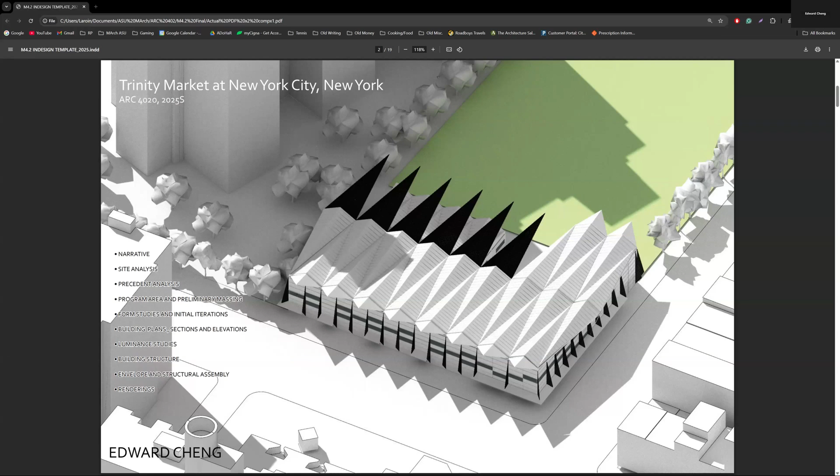Our assignment for this project was to conceptualize and develop a marketplace for a city. This market, Trinity Market, is located in New York City on the southeast side of Manhattan. Here we see the market itself on the site. We'll go back to this form, but something I want to highlight is the roof shape, which was really the primary driving force of the shape itself.

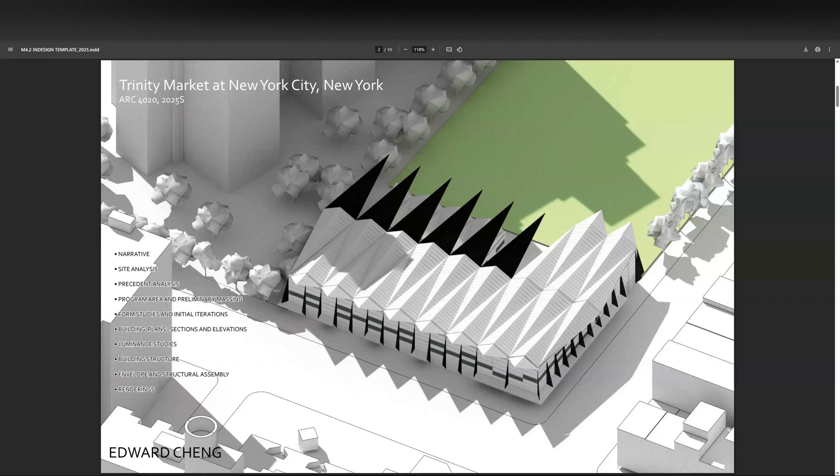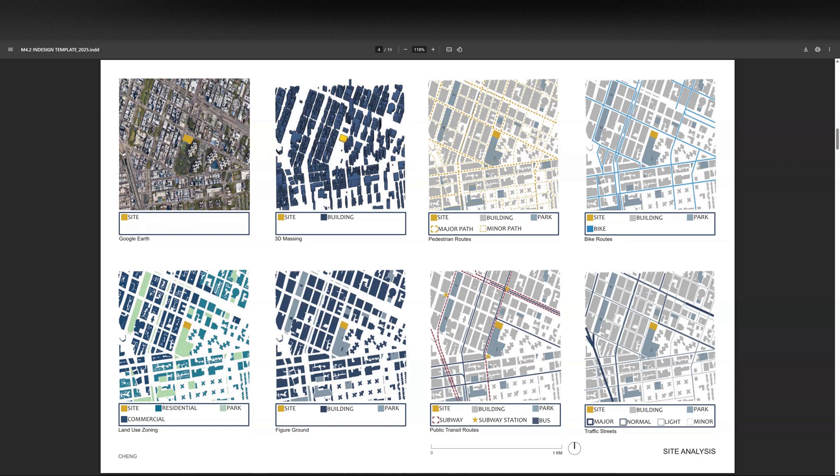Moving on, we have the site analysis of the area, the city that our market is situated in. The main streets are Grand Street, which runs left and right, and Essex Street, which runs diagonally north and south. The market site is on the yellow center block there. Our market site is located between the Williamsburg Bridge and Manhattan Bridge, and also sits between the commercial section of the city and the more residential parts, as you can see in the bottom left.

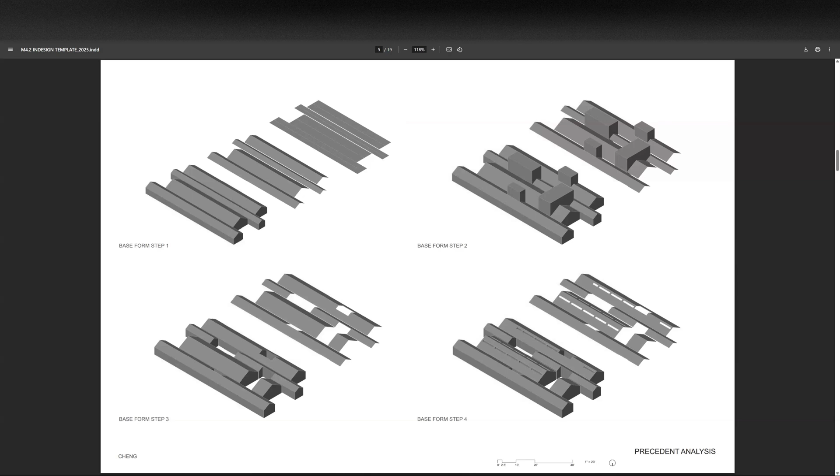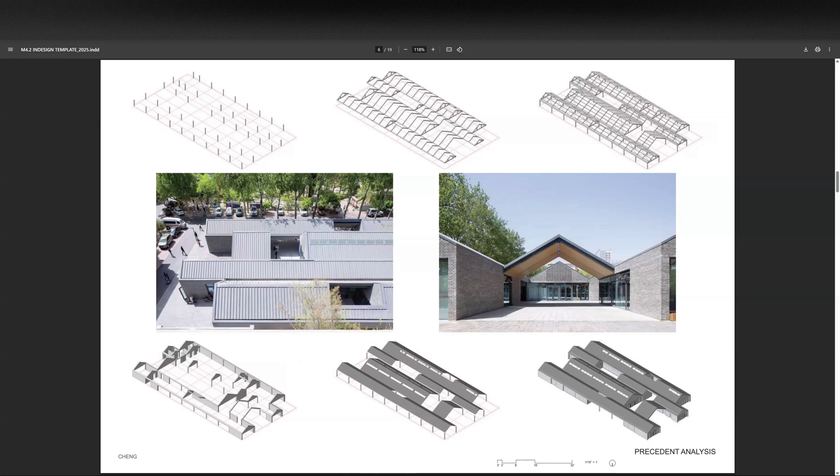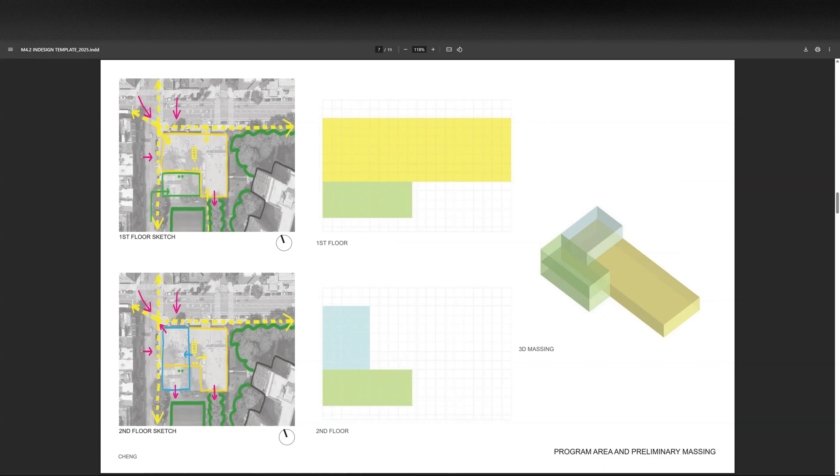Moving on, we return to the site, and here we have some initial sketches I made early on to clarify where traffic comes and goes and provide a general sense of the layout. In the middle and to the right is the preliminary market layout I chose to pursue, with the market hall dominating the space in yellow, and the green service cores flanking it to the south. The blue community service, part of the market, is located on the second floor here. And things get shifted around, as we'll see.

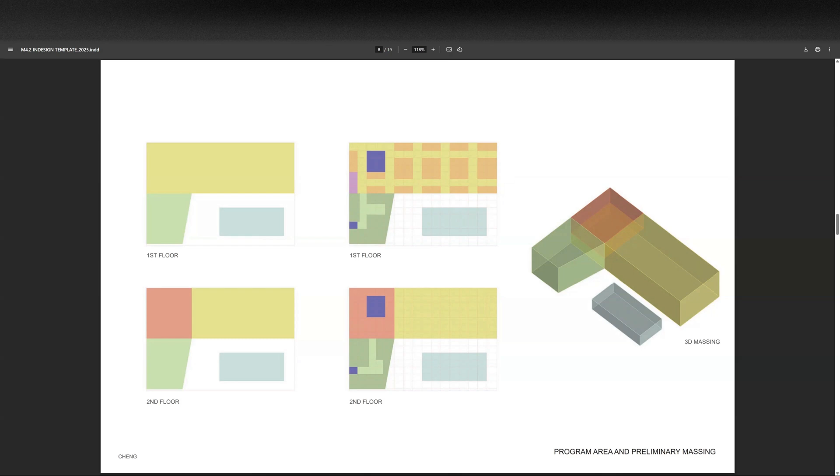This is the final iteration of the market. As you can see, the market hall is still uninterrupted, still dominating the space, still flanked by two stories of service cores. However, the community center is no longer part of the main building and instead is on its own, situated in a plaza formed by the L shape of the market itself, with foreground and background considerations. Where the community center was, it's now a cafe space with a window that looks into the market hall and vice versa, for interaction between customers and diners.

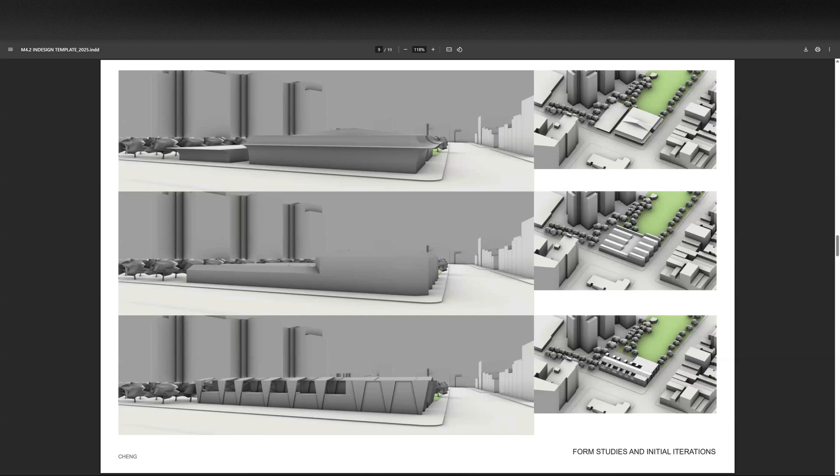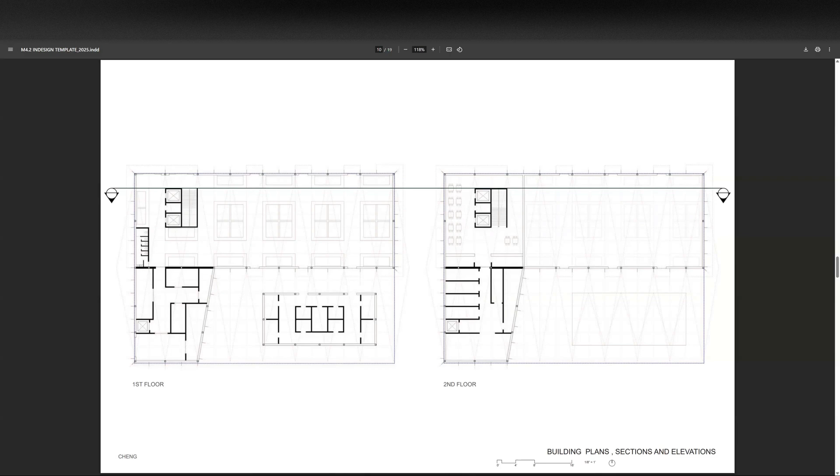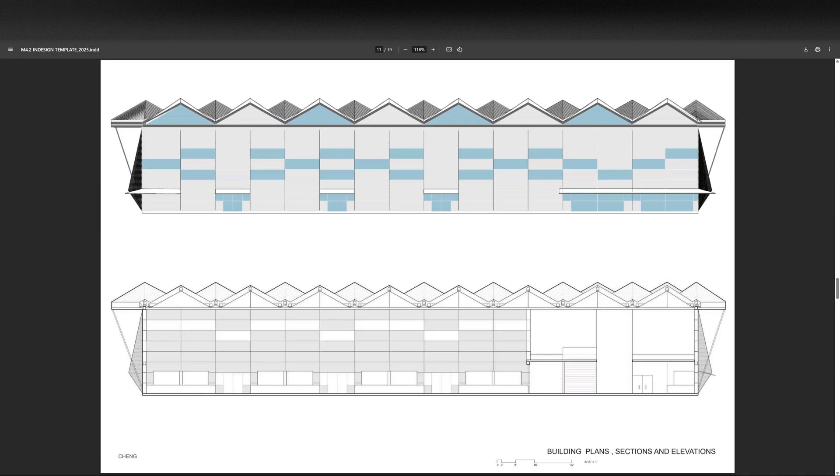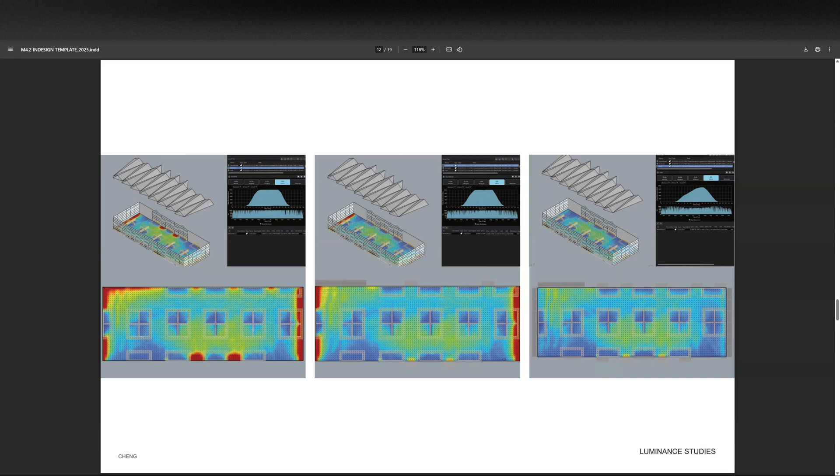Moving on, we have Climate Studio light studies. The market space in these shots has been updated since, but a majority of light interactions generally remain the same; not much was changed besides adding a few things. As you see from progression left to right, adding shade louvers and those vertical shade structures helped mellow out the light coming in from the sources and from the sides, leading to our final product on the right, with a very consistent overall lighting aspect.

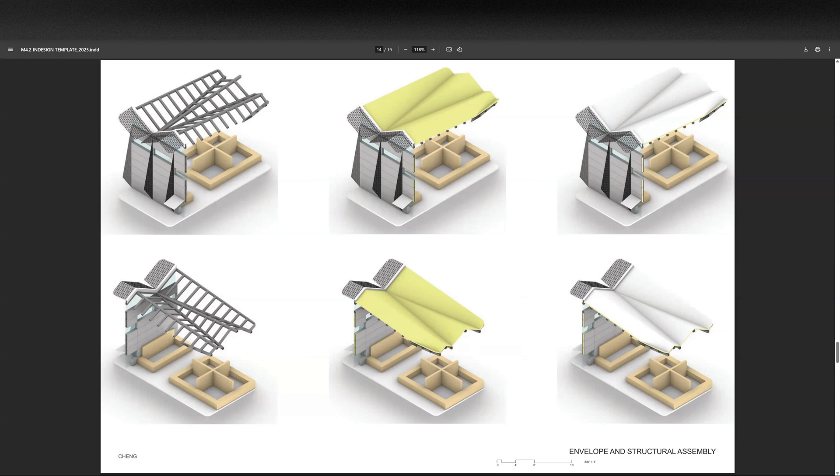Here's the same section cut, just with the structure built up. As you can see, the roof framing, insulation layers, vapor barrier, decking, and final finishes.

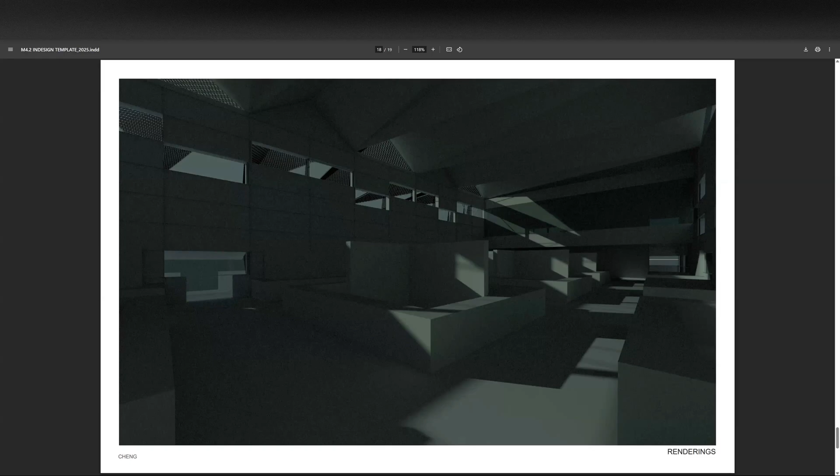On the right, you can see the cafe space and the windows and how they overlook the market hall itself. Up top, you can see the folded plate roof structure highlighted, giving the space a vertical dynamic instead of just a plain flat roof or ceiling.